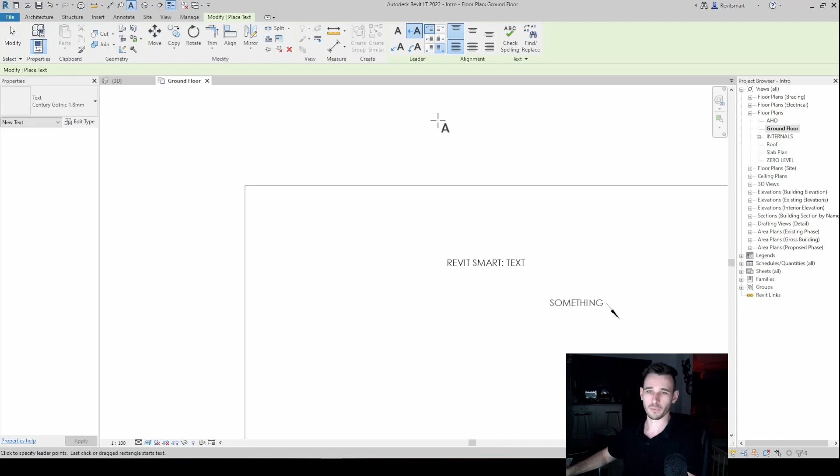First thing you'll note is often if you have a leader which you've already placed when you previously put some text in, it's still going to have that option selected. So say we had a leader and we've just written something here, and then we go to use the text command again, see how it's already got what the last command had selected. This can be a bit annoying if you're trying to just do a standalone text box, and you click and then it wants you to do another leader. So generally when you go text, have a look at what the leader situation is before you place anything.

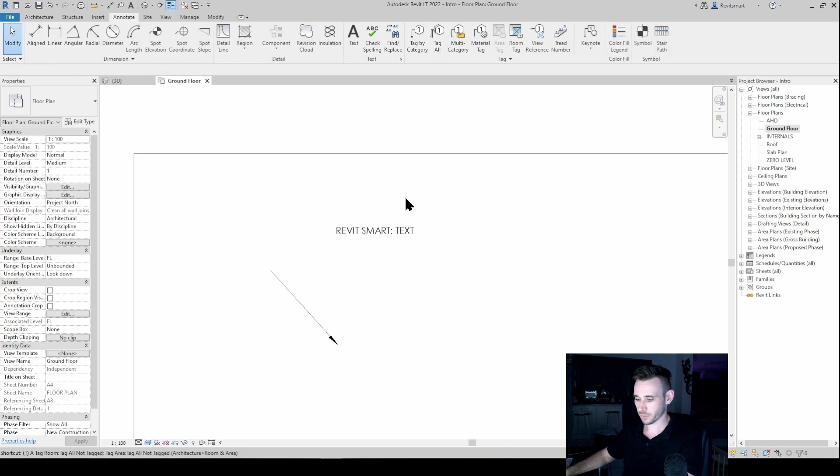With the leaders themselves, you've got a few options. You've just got the one segment, which just kind of looks like that. If you want to do two segments, you can have nice straight leaders like that. And additionally, if you're doing some real concept stuff, or some fancy work, or if your office standard is trash, you can do some curvy leaders. Three options, nothing wrong with any of them in particular.

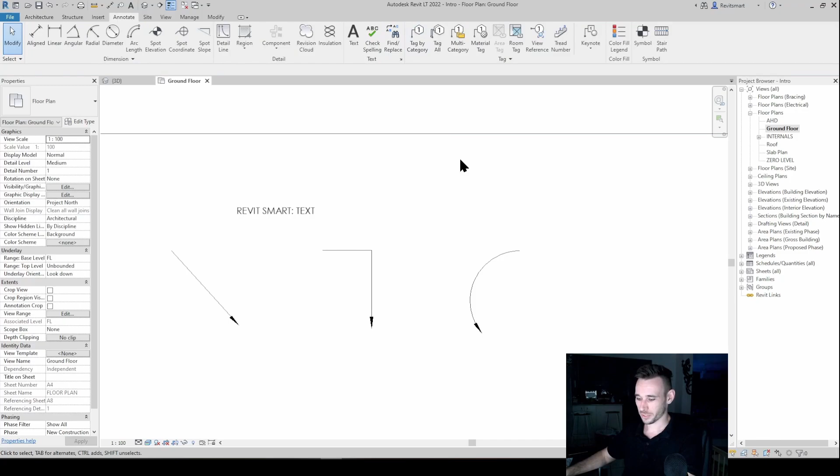You'll notice these buttons next to it here, this is the location of the leader itself. I'm not going to go on about that too much, but essentially where that little diagram shows is where the leader will be coming from with that text.

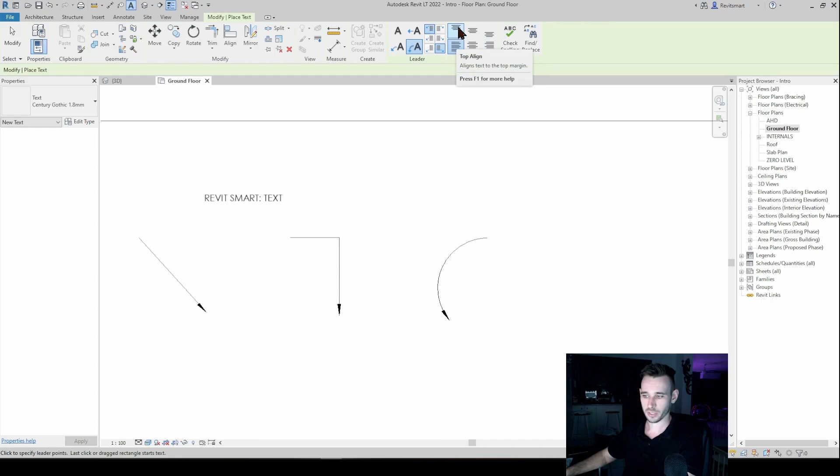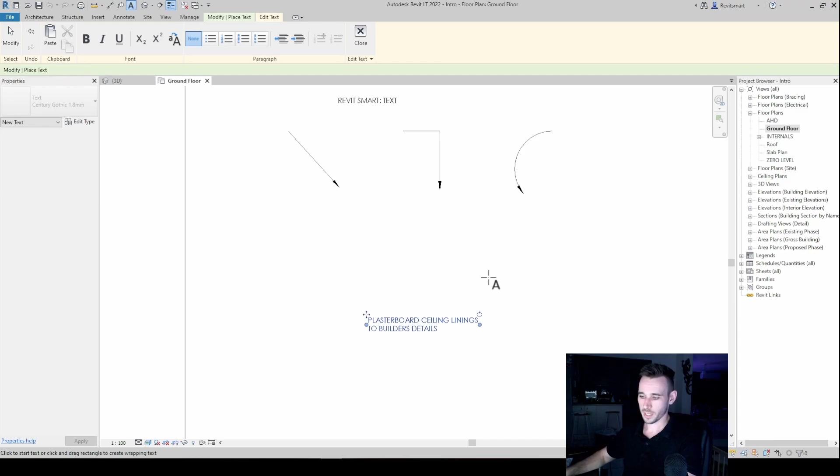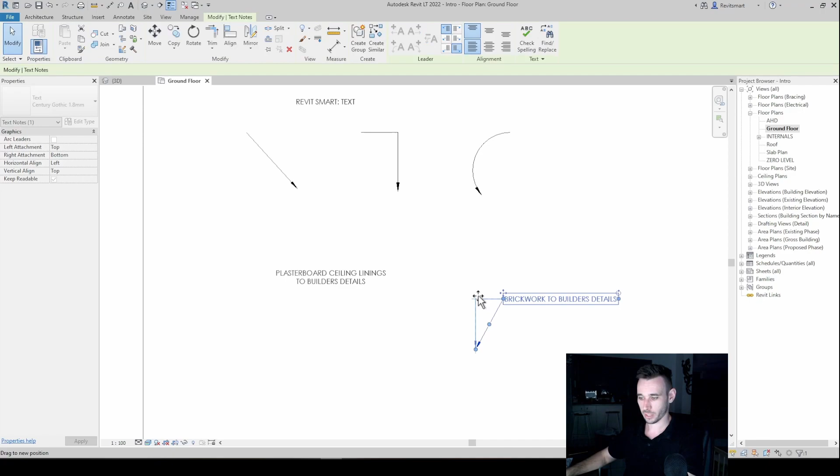Additionally, you have some alignment here as well, so it'll justify to the left, justify to the top, and then the center to the right, etc. If you're doing text without a leader, for example, if it's over two lines, that would probably look better centered like that. Whereas if it's going to be a note with a leader, it would look better justified to the side like that. And I probably should have done a 2-point leader for that.

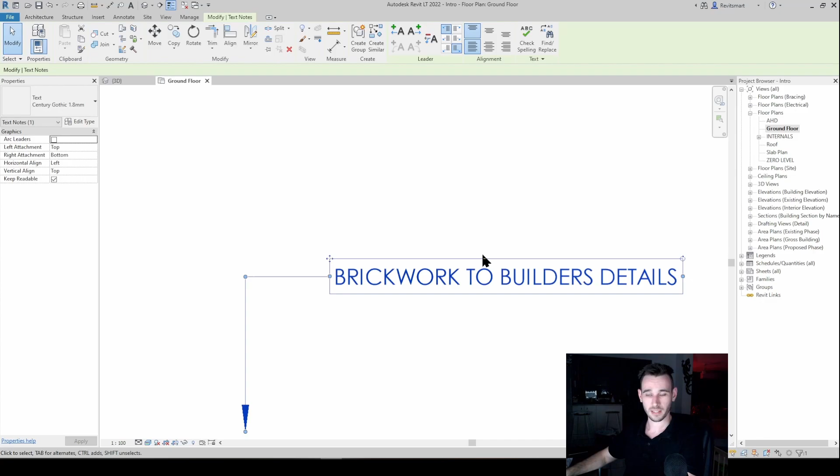If we select the text, you'll see there's a drag button up here, which is just the move symbol - absolutely no prizes for guessing what that does, but it just moves it around. You can rotate the text if you click on the rotatey little button thing there. And then these little blue circles on either side of the text, that is going to drag the ends down.

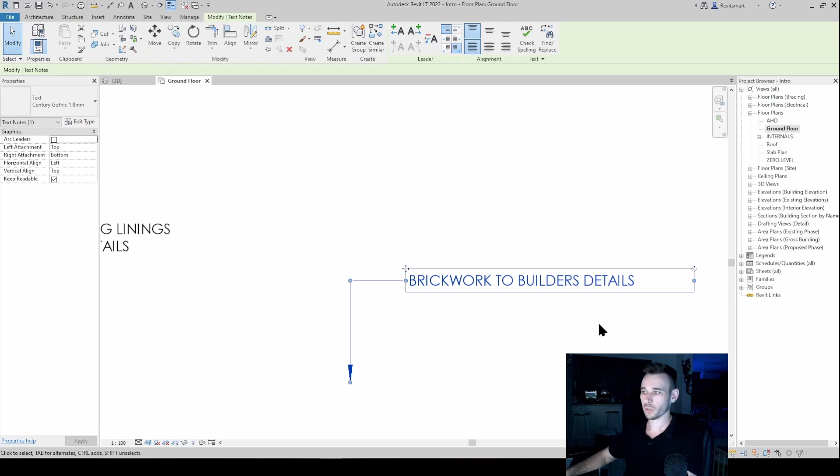So if I was to select the end here, it's going to knock that text onto another line. A smart way to do it is to type all of the text out in one long row, and then just drag it in so that the note fits the size that you have allotted to it.

I think I mentioned this when I did the video on the annotate button, but Revit actually has a check spelling button, for what that's worth. And find and replace is also a really excellent tool, which is going to read the text in the entire Revit file.

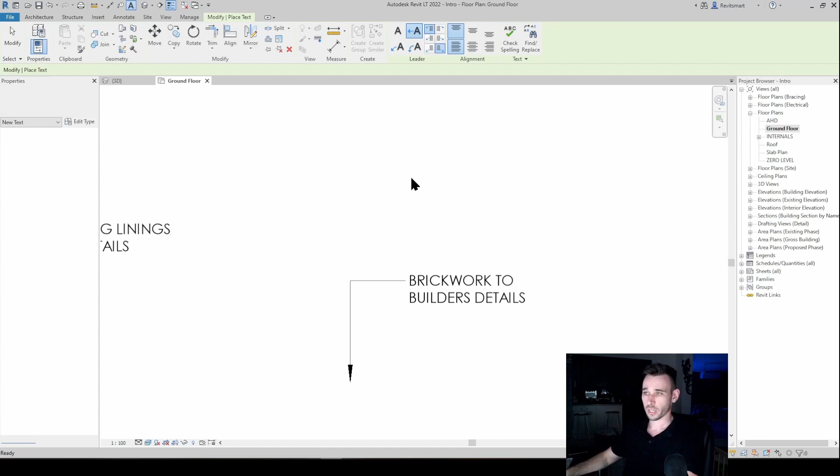So if you've ever got a change where, say, a wall cladding is changing from just saying selected lightweight cladding, and you've got that on all of your elevations and they're not tagged, if you change one of them, they're not all going to update. You can use the shortcut, I think it's FR, which is just find replace, but it's also up in the annotate tab there. You can find something, and if you click entire project, it's going to look through the whole project, then you can find whatever it is you want and replace it with whatever it needs to be. It's just a really handy tool.

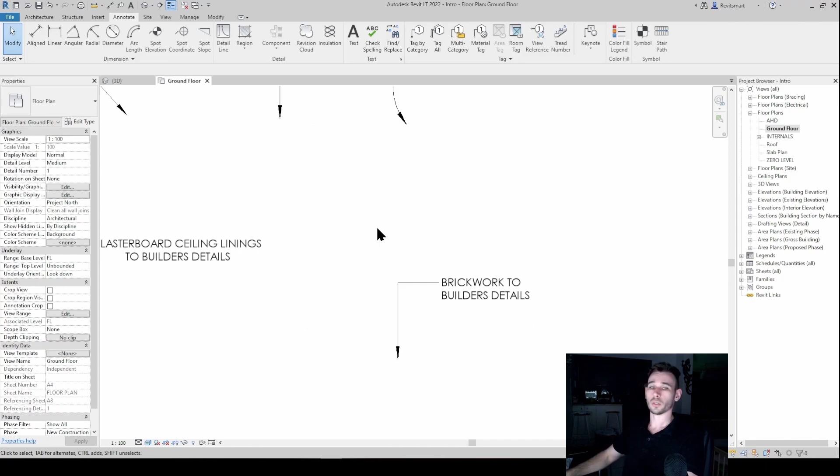You'll notice with some text styles that there's going to be a ton of different ones set up in your Revit template. Generally you'll have a different text style for each different size, and then you'll have different categories within that size, for bold, or for one with a border, or a different colored text.

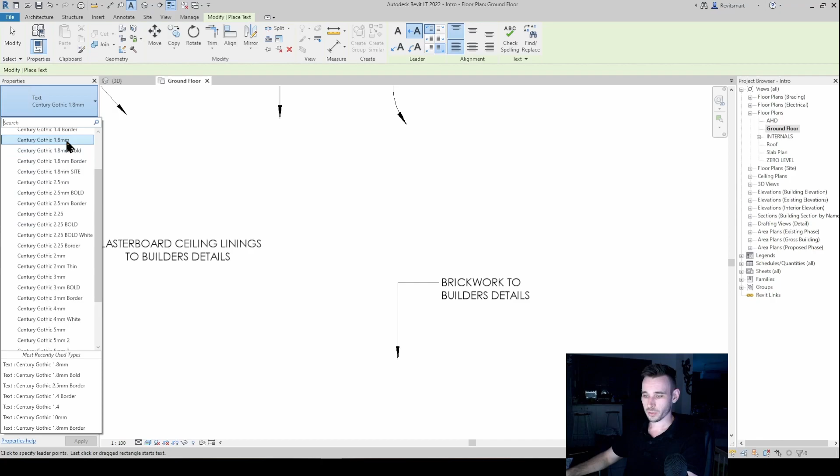If I select Century 1.8, which is the standard text we use in the office I work at, all of the information here are type parameters. So if I wanted this text to be a different color, or have a different transparency to the background, you'd just create a new type for that new text rather than modifying the existing one. There's no harm in making a bunch of different text types, though some people might have an issue with that.

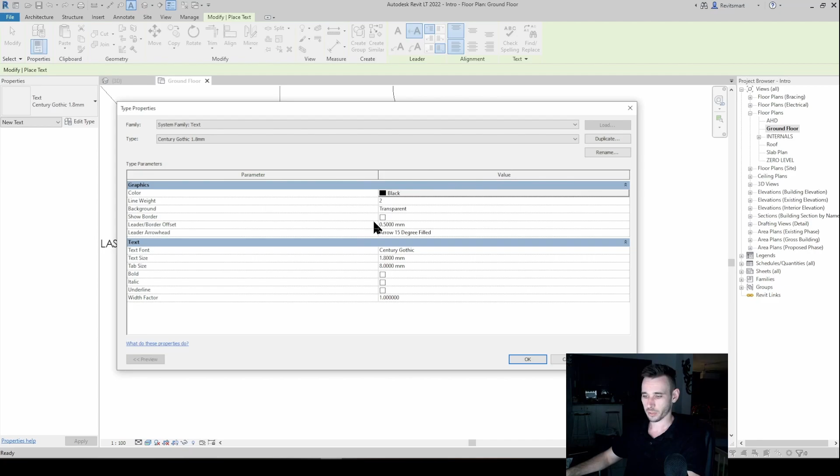There's a good bit of control over how the text will show up, so you can change it up so it has a border. Let's just make a totally new text style to go through it. We're going to make it by duplicating an existing one, and we'll call it Revit Smart Text, because why not?

For color, let's make it kind of like a gunmetal black or gunmetal gray. Line weight, let's make it 3. Background transparent - I'll show you what that means.

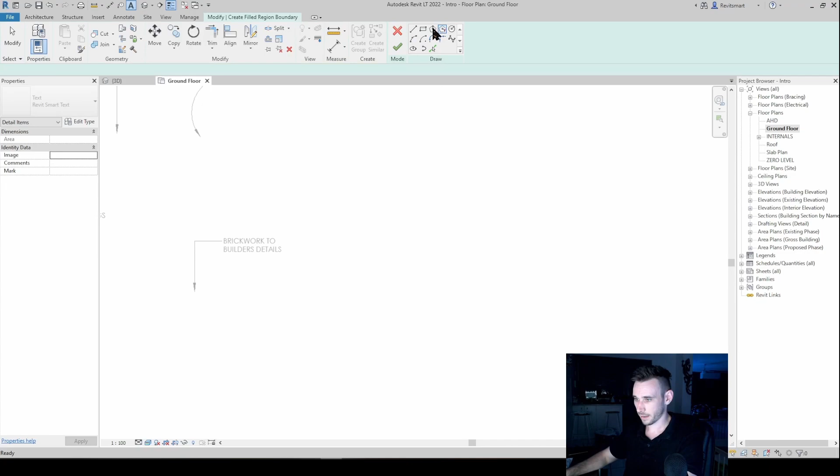So if we have a filled region here, and we just put some example text in it, see how the background of that filled region is showing up through the text itself. If we change the type and set the background to opaque, that fill won't show through anymore - it creates a masking region behind the text.

If we go to show border, that's now going to show a border around the text, whereas before there was no border. You could see the border when you highlighted over the text, but not when it's not selected anymore.

At the moment we've just got a little leader arrowhead that looks like that, but there's a few different ones to choose from. Have a scroll through and just choose one that you like - I actually do like this one.

And then of course we've got the text font, the size of the text, the tab size, whether it's bold, italic, or underline, which you can set up here in the type parameters. It'll be like that anytime you use that text, or you can always override it - if you click on the text again, it takes you to a modify note where you could make it bold, for example.

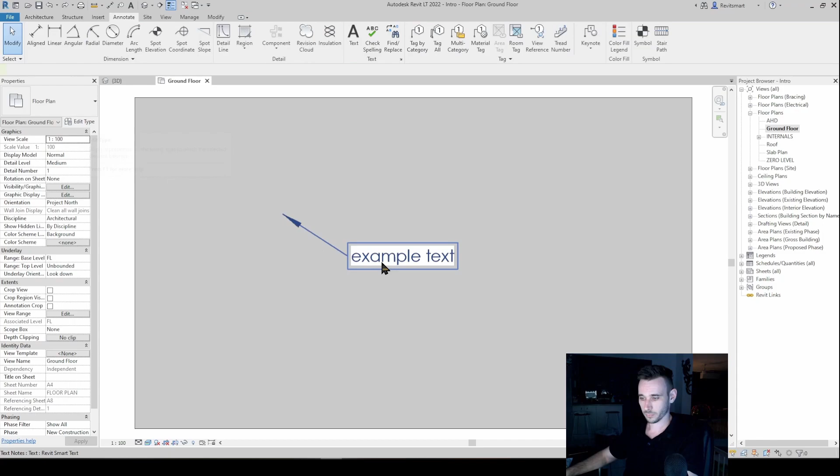If we were to go crazy with all of these examples, yeah, that looks just shocking, just terrible - so you can't go too far. It gives me great pleasure to delete that, and we'll go back to our trusty standard.

We'll type in a little example sentence here so that I can show you some more tools you can use when actually modifying the text.

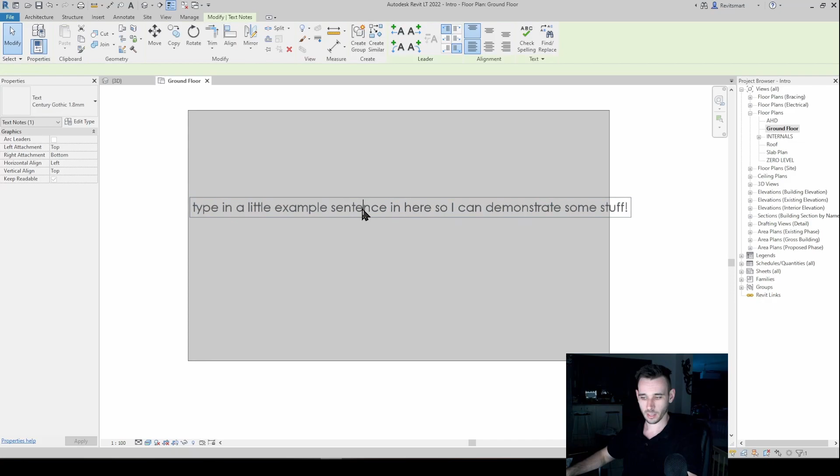Now, if we select the text and click on it again, it brings up a different kind of ribbon up here. As mentioned before, you can override things, add bold, italics, underline, etc. Additionally, you can do subscript and superscript.

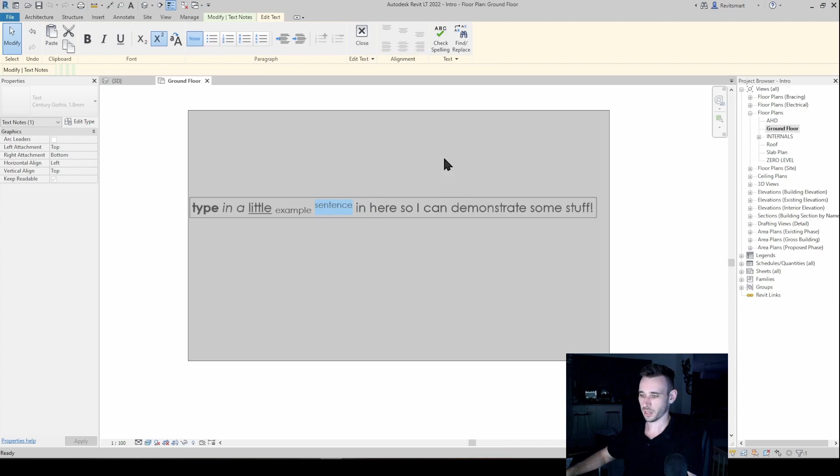So if we wanted this example to be smaller text, you can do so. Same deal with superscript, but just using these little buttons here. It's pretty self-explanatory - don't have to use this stuff too much, but it's good to know.

One tool that is very legitimately handy: if we select all of this - and so often is the case when you accidentally type something - most drafting offices have everything in full caps lock. So if you've typed something and noticed it's not in caps lock, you don't have to delete it. There's a button up here which will make it all caps lock, which is super handy if needed.

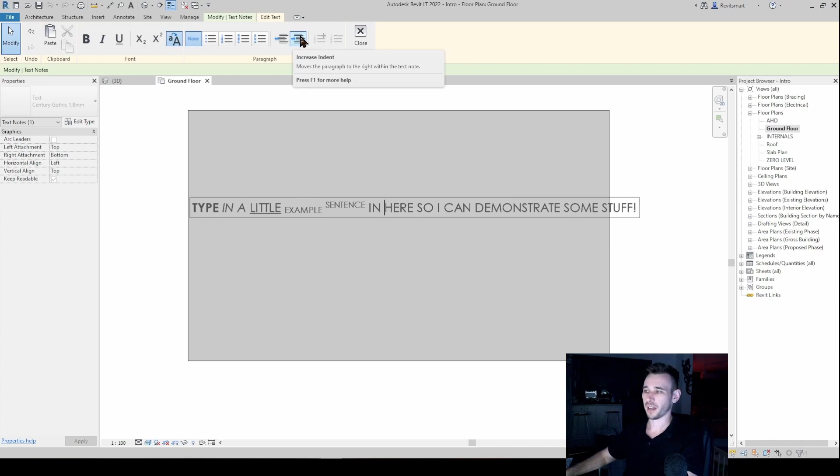Additionally, you have the standard controls you'd expect in any Word document or Excel document, like putting little dot points, indenting paragraphs, and stuff like that. Everyone should know how that works, so I'm not going to get into that.

Alright, that should just about wrap it up. I hope you got something out of that. If not, then I hope you enjoyed our lovely time together.